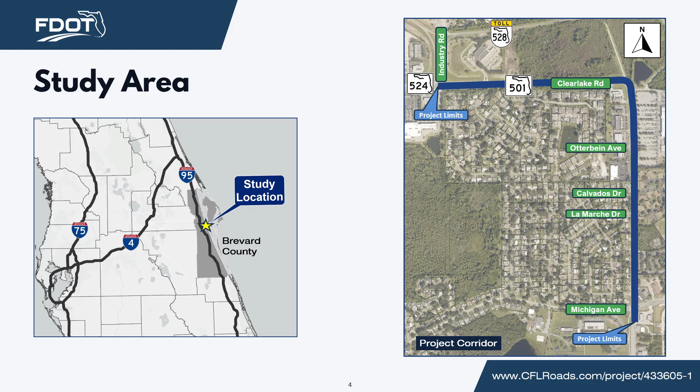A PD&E study is a blending of engineering, environmental assessments, and public involvement activities. The process is used by engineers and planners to determine the location and conceptual design of preferred roadway improvements. The PD&E and design phases of this project are fully funded and overlap. The right-of-way phase, which involves acquisition of any necessary right-of-way for the construction of the project, and the construction phase of the project are currently unfunded.

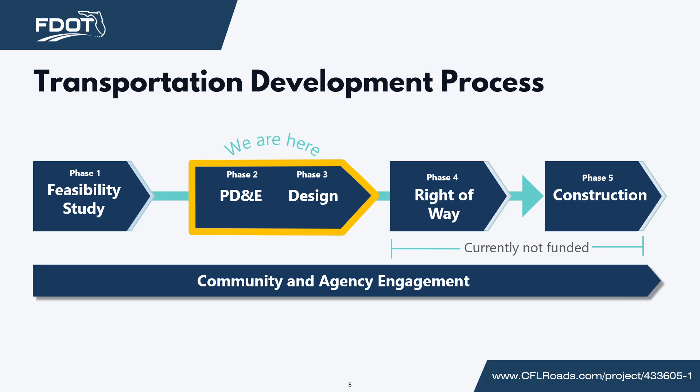A PD&E study for this project was originally completed with the approval of a State Environmental Impact Report, or SEIR, in 2017. FDOT is conducting a PD&E study update to refresh the environmental analysis and to comply with the Federal National Environmental Policy Act, or NEPA requirements, to expand opportunities for federal funding for the project construction.

The purpose of this study is to increase capacity on State Road 501 within the project corridor. The project is needed to address projected future traffic growth on the facility, improve modal interrelationships, and to enhance safety for all motorists, bicyclists, and pedestrians.

The level of service, or LOS, helps us understand how smoothly traffic flows on roads and at intersections. LOS is rated from A to F, where A means traffic moves freely and F means very heavy congestion. Traffic along State Road 501 is expected to worsen as usage increases over time. Long-range modeling, which projects traffic levels out 25 years, indicates that by 2050, traffic conditions are forecasted to range from moderate to heavy, leading to longer travel times and increased congestion on the corridor.

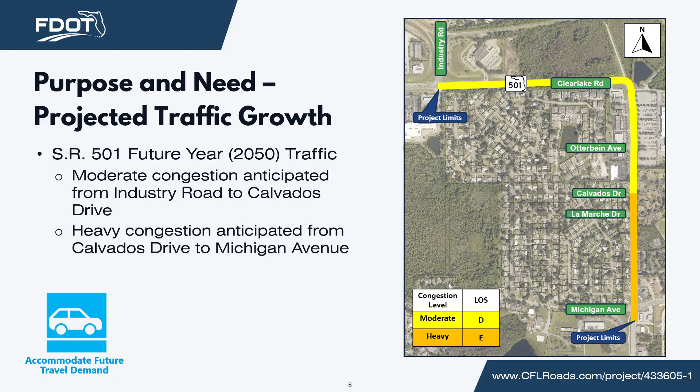Another need on State Road 501 is to improve the relationship of all travel modes within the project corridor for vehicles, pedestrians, and bicyclists. There is an existing 6-foot wide sidewalk on the east side of the project corridor, along with a short segment of sidewalk on the west side, which varies from 5 to 6 feet in width, and no designated bicycle facilities within the project corridor. This corridor was identified by the Space Coast Transportation Planning Organization, or TPO, as a priority corridor for bicycle and pedestrian improvements.

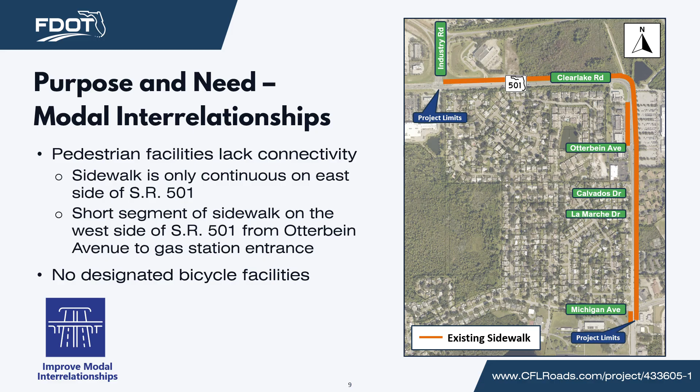The crash analysis for State Road 501 revealed a total of 167 crashes between 2019 and 2023, with no fatalities, 63 injury crashes, and 104 property damage-only crashes. Rear-end collisions were the most common crash type, followed by head-on collisions. The Space Coast TPO listed the segment of State Road 501 from Otterbein Avenue to the 90-degree roadway curve in its ranking of high injury corridors.

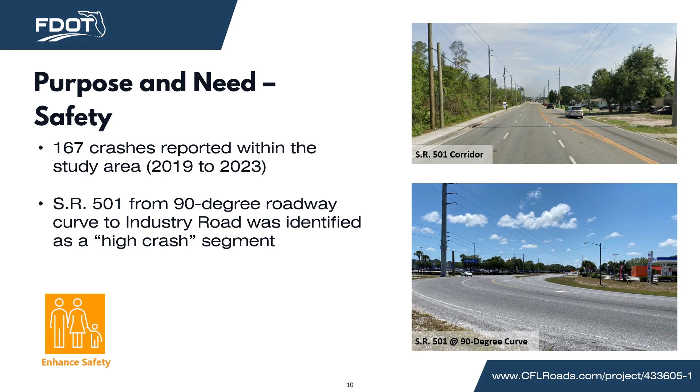Furthermore, the segment of State Road 501 from the 90-degree curve to Industry Road was a high crash segment during the study period with an actual crash rate that is nearly 5 times greater than the statewide average for similar facilities. The existing 90-degree curve accounts for 14% of crashes within the identified high crash segment, with primary causes being speeding and wet pavement conditions.

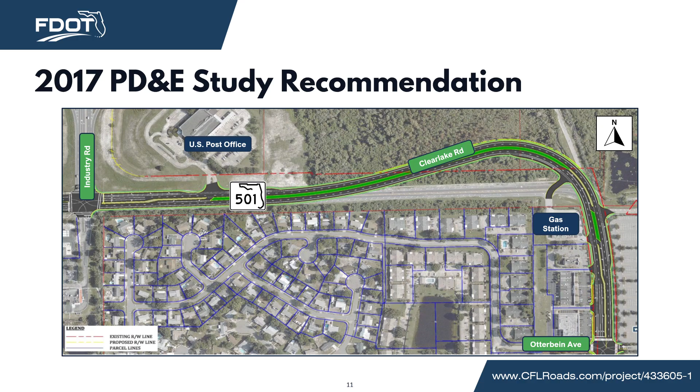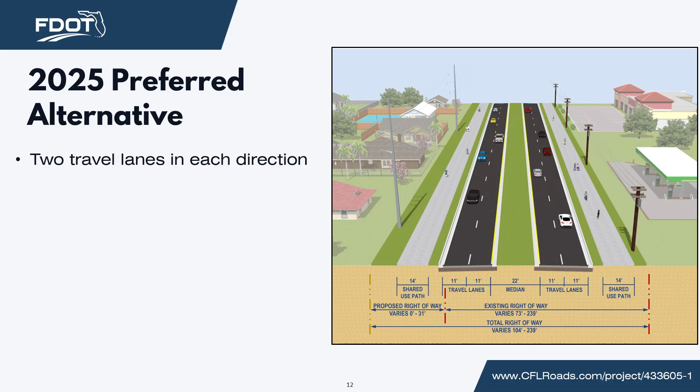The 2017 PD&E study analyzed several alternatives and recommended widening from 2 to 4 lanes, and the existing 90-degree curve would be replaced with the 35-mile-per-hour bulb-out design in order to create a more gradual curve. The preferred alternative for this 2025 PD&E study update still includes widening State Road 501 from 2 to 4 lanes as shown here. The proposed typical section features two 11-foot wide travel lanes in each direction, separated by a 22-foot wide median. The corridor would also feature 14-foot wide shared use paths along each side of the roadway. The total right-of-way varies from 104 to 239 feet.

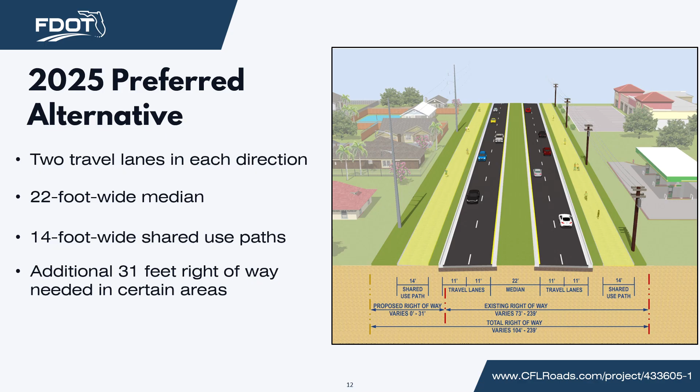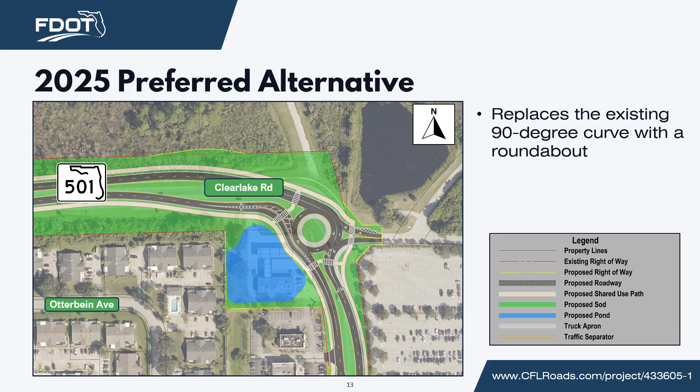There are various benefits of the proposed modern roundabouts in contrast with traditional traffic circles. Unlike traffic circles, modern roundabouts are designed with a focus on safety and traffic flow efficiency.

Modern roundabouts function through yielding, thus eliminating full stop conditions and delays associated with traffic lights. Connectivity and safety benefits include allowing continuous traffic flow where drivers keep moving through the intersection without stopping. This can increase intersection capacity up to 50%.

Modern roundabouts can result in less severe crashes when compared to regular intersections due to the reduced conflict points and the elimination of head-on and high-speed right-angle collisions.

Additionally, roundabouts have 90% fewer fatalities and 75% fewer injuries due to the removal of right-angle, head-on, and T-bone conflict movements. They can also reduce up to 40% of pedestrian and bicycle crashes.

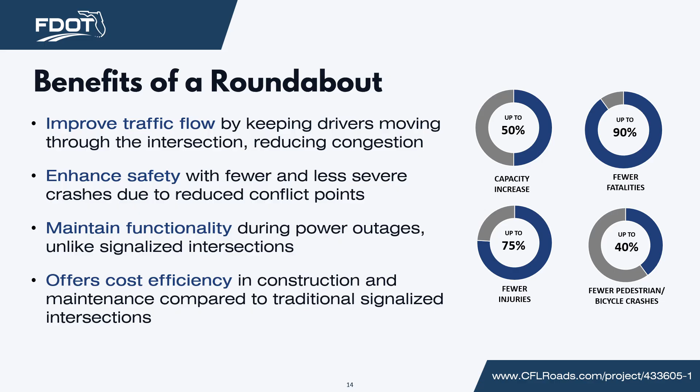Benefits also include maintaining functionality during power outages and lower construction and maintenance costs when compared to traditional signalized intersections.

The addition of the median will change the access management class of State Road 501 from a Class 4 non-restrictive facility to a Class 5 restrictive facility, with median openings located at specific crossroads and access points.

On State Road 501, from south to north, a signalized median opening is proposed at Michigan Avenue, and directional median openings are proposed in front of the entrance to the Woodland Commons office complex and at La Marche Drive. The access points are the same as those presented in the 2017 SEIR report.

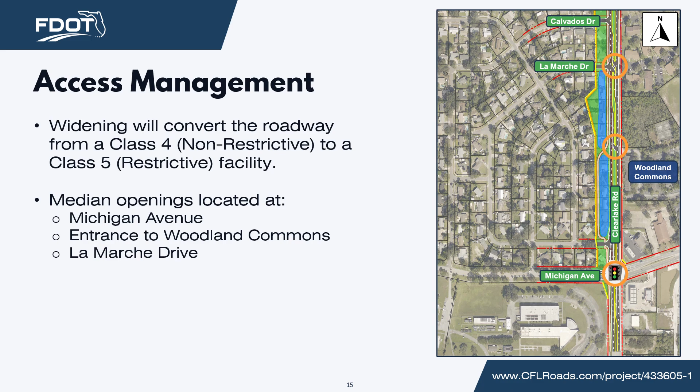A signalized median opening is proposed at Otterbein Avenue, with the proposed roundabout located at the existing 90-degree curve, and a directional median opening in front of the U.S. Post Office entrance. A signalized median opening is also proposed at Industry Road.

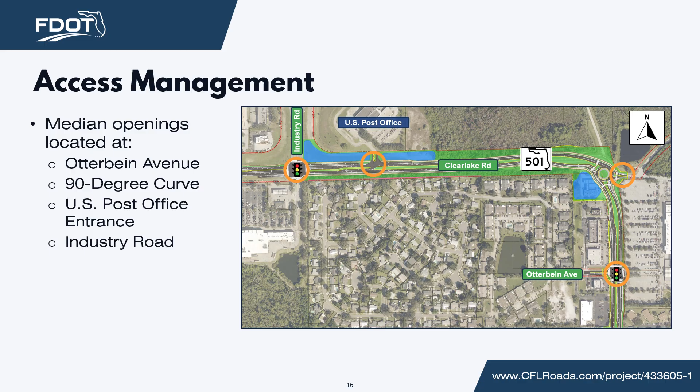The project will require ponds to hold and treat stormwater that runs off pavement and other impervious areas. FDOT decides where to build new stormwater ponds by studying nearby locations, taking into account elevations, soil type, the existing water table, and what body of water will get the runoff.

Engineers also analyze impacts to wetlands and endangered species, cultural resources, potential for contamination, and potential impacts on nearby utilities. Five pond sites are proposed as part of the study improvements and are shown here on this slide. The proposed pond sites are generally in the same locations as presented in the 2017 SEIR.

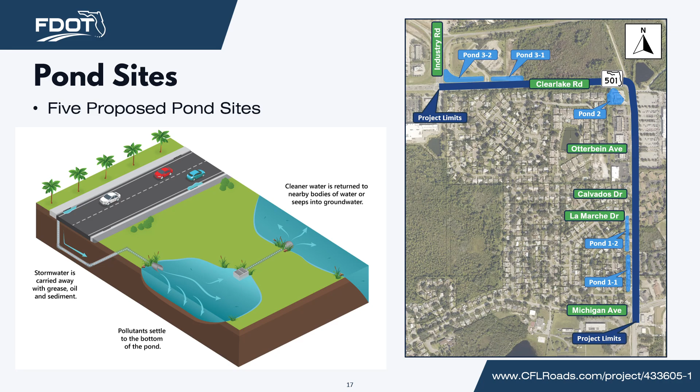The PD&E study has evaluated the potential impacts and benefits to the social and economic, physical, natural, and cultural environments associated with each alternative. Avoidance or minimization of impacts to these features is a key consideration in the selection of the preferred alternative.

Even though the no-build alternative does not meet the purpose and need, it was carried throughout the study for base comparison purposes. The preferred alternative will result in 6.7 acres of right-of-way acquisitions affecting 28 parcels. 17 residences would require relocations, and 2 businesses, located on one parcel, would be displaced.

The preferred alternative is anticipated to have an adverse impact on 14 noise-sensitive sites within the study. However, a noise wall is proposed in front of the College Green Estates to help mitigate that noise impact.